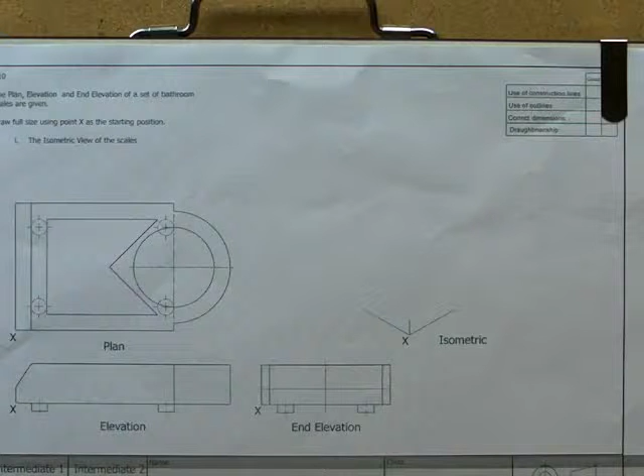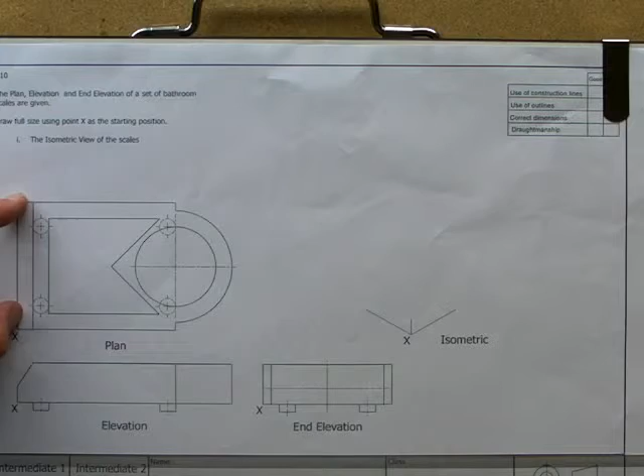Okay, so here we have A10, which is an isometric drawing. I'm going to get started just basically forming a cuboid, which is the length and the width of this shape here. This is maybe a set of bathroom scales, so you would put your feet there and the display here would show what weight you are.

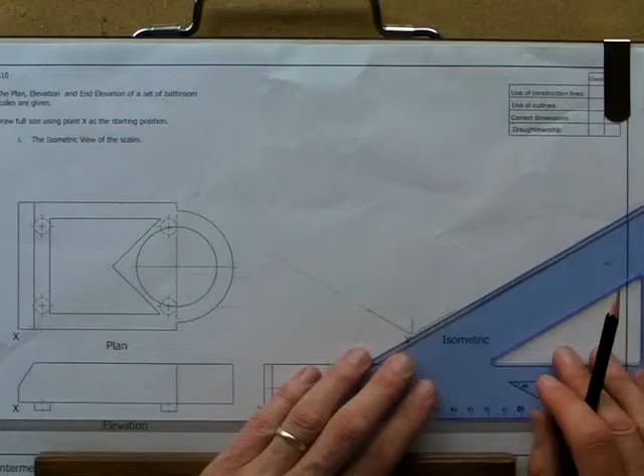Now, since it's an isometric, we're using a 30-60. So first things first, I'm just going to extend the 3 lines that are already there. And these are just extended, kind of rough sizes just now.

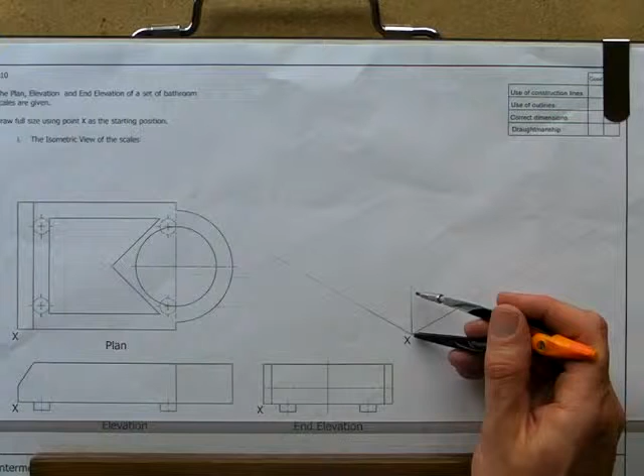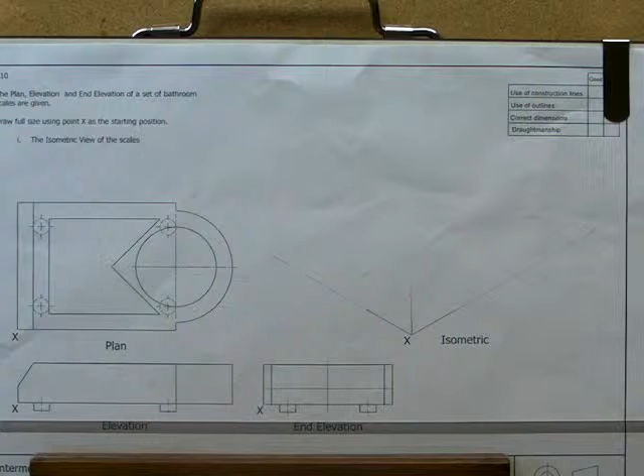Okay, now what I'm going to do is take some measurements using my compass. I'm going to measure the height, and then transfer it to here. I'm going to measure the length, and the full length is from there to there, and then I'm going to mark that one here. And then the width, which I'll measure across here, and transfer that onto here.

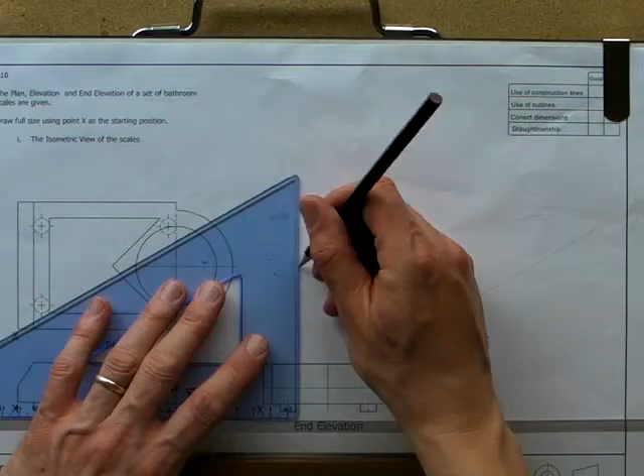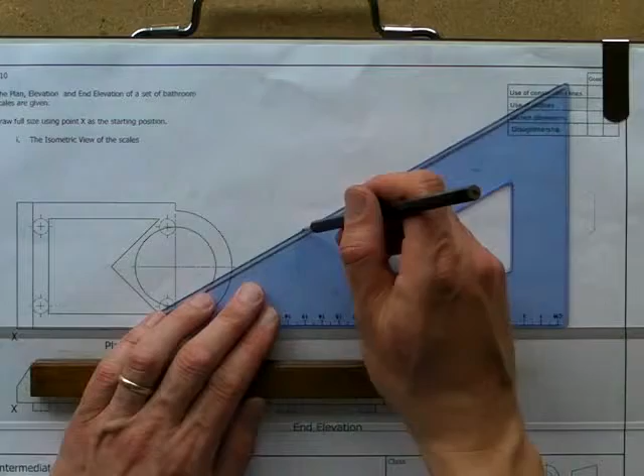Okay, so to these sizes I'm going to create a cuboid. So I'm going to go up from here, across from here, back from here, up from here, back from here, and then across from here. Okay, that's a basic cuboid.

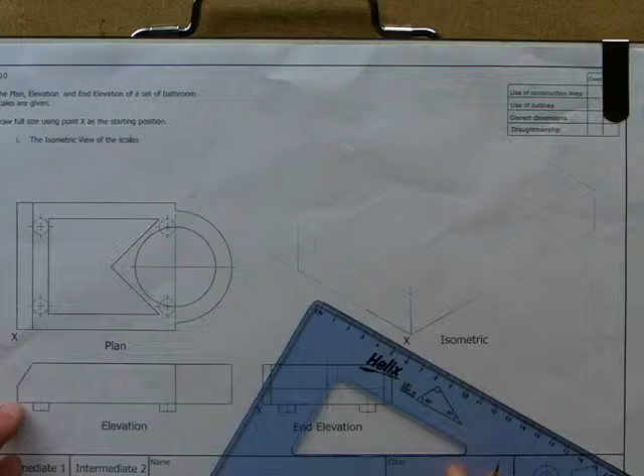Now obviously it isn't a cuboid because we've got this curved part here, we've also got this slanted part here. I'm going to deal with the slanted part first. The important thing about the slanted part is this side here is this side here. So if I can find where that point is and where that point is on the side, then I can just draw a line between them.

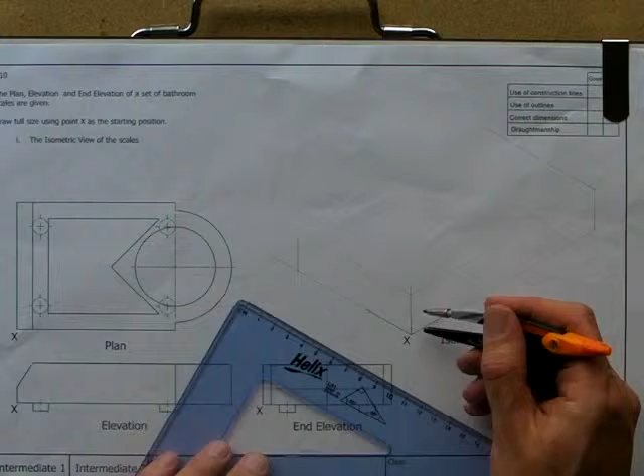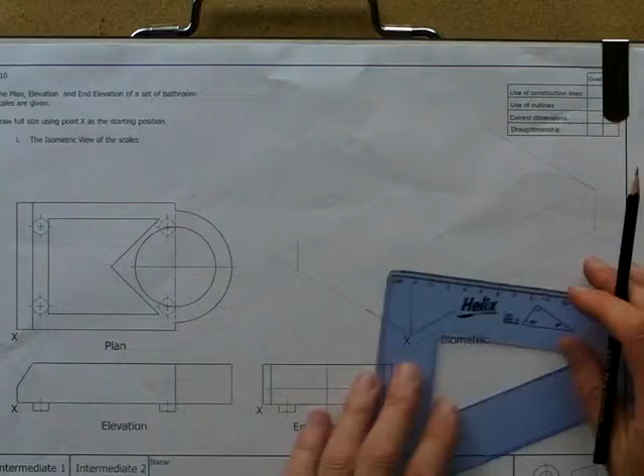So to do that, I'm going to measure the height from here to here, then transfer that onto here. Then I'm going to measure how far in it is. Now, how far in it is given by this distance here. As you can see, that's in line with that there. So I'll just measure that there, and then transfer that onto here. And where these two come together, I can just draw a line.

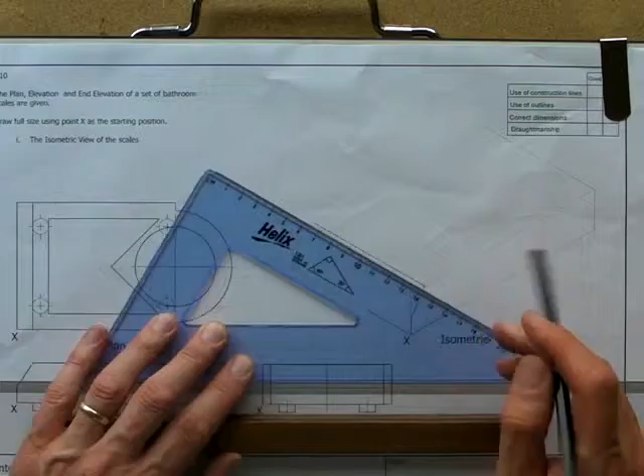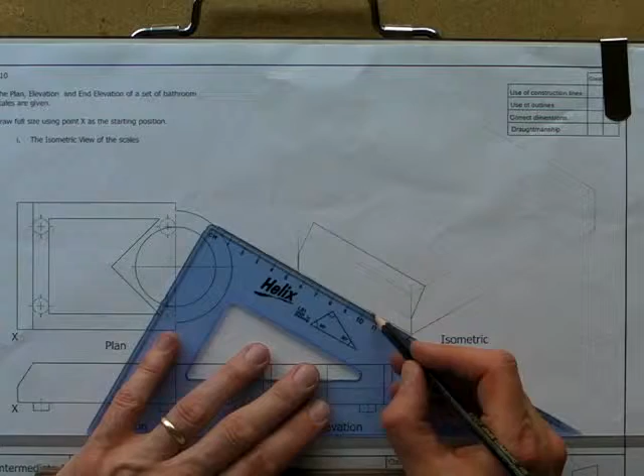So now I know that I have more or less the same on the other side, so if I just transfer this line across to here, and then this point across to here, and if I join these two up, then I have this part. Now I'm just going to finish off this end, just so that you can see what it looks like, just darkening that in.

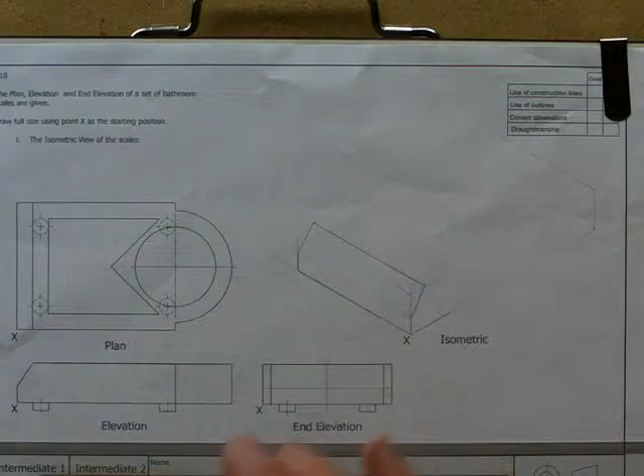Okay, right, at this end here we've obviously got the curve going on, and in order to do that we're going to have to put generators on this, because this is an isometric curve we're going to draw. So I'm going to deal with the outside curve first. I'm going to draw some generators using my 30-60.

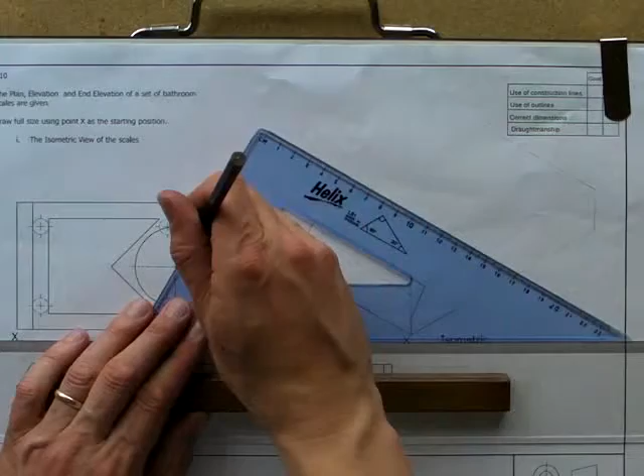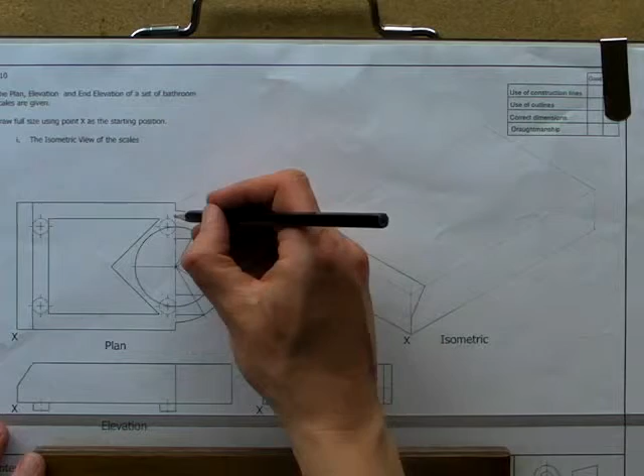Keep rotating this round, like so, keep rotating it through the centre to the outside edge, and then just draw lines from where it cuts the outside circle to the centre line, to the centre line, to the centre line, to the centre line, like so. Okay, 1, 2, 3, 4, 5, 6 and 7.

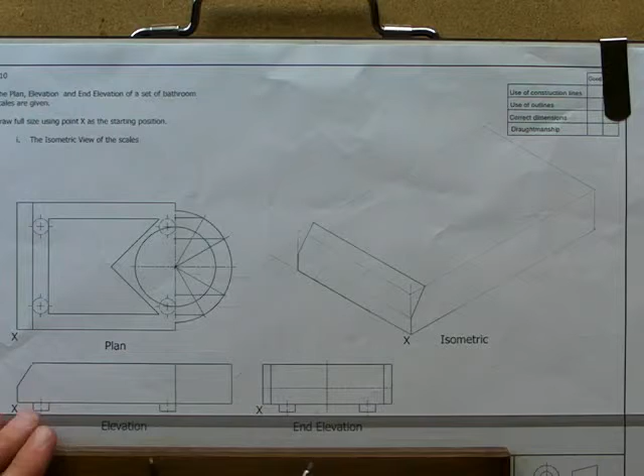All these points we have to plot along here, so obviously we need to work out where that centre line is on here. Again it's down to using your compass to work that out. If I follow the elevation, I can measure the distance between here and here, and that gives me the position along the side here. So I'll just show you that again.

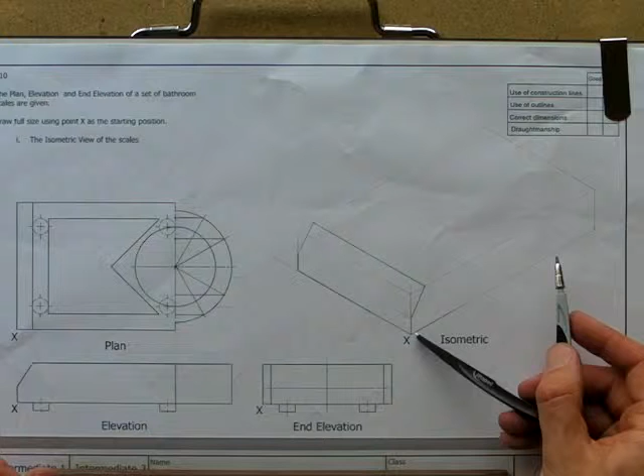Okay, now I could mark that on there, which would be fine, or I could measure it from there. I'm just going to mark it from here, which is fine. Mark that one there, and then I just have to project that line up, and then project a line across from that, like so.

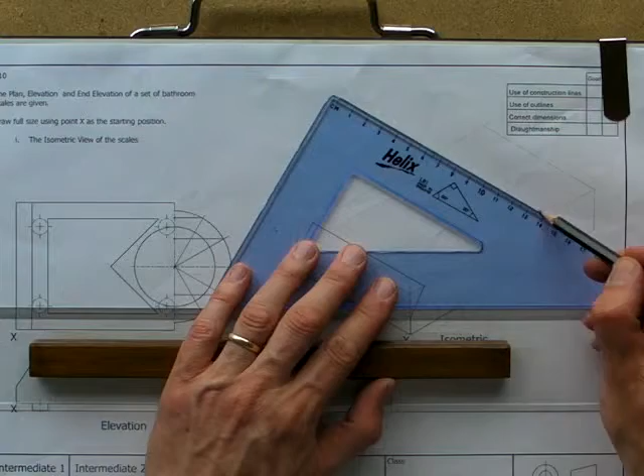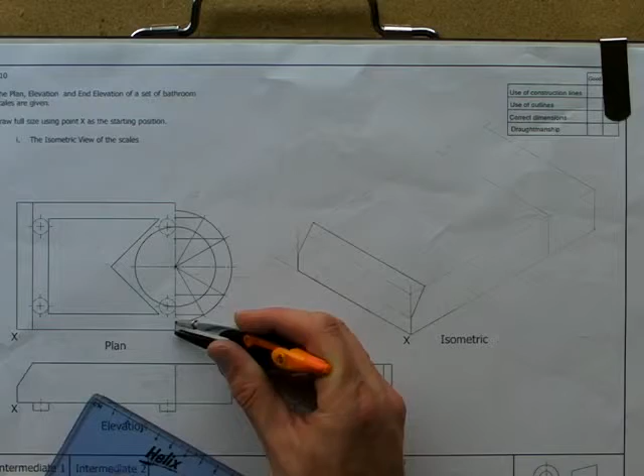Now, we also have these wee distances here where it comes in, here and here. So I'm going to measure that distance. It is symmetrical, so I'll need to measure it once. I'll measure that in to there. Mark it on here, and mark it on here.

So now I've got a centre line, which I'm going to mark in quite heavily so that you can see where it is. So that's just there. Long, short, long, short, long, short, long. Okay, so that's my centre line there.

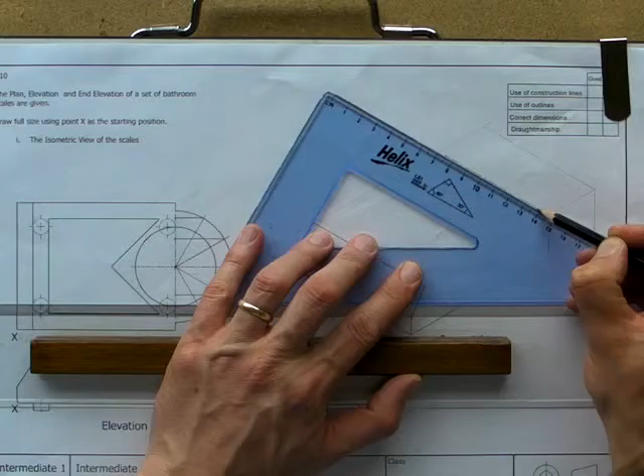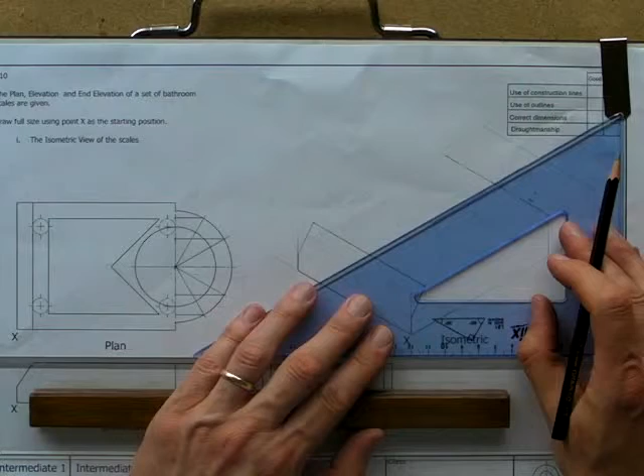Okay, I need to get the actual centre of it, so I'm going to measure from here to the centre, and then from here to the centre, and once again draw a centre line here. So it's long, short, long, short, long, short, long, short, long. Just extend that past the outside edge there.

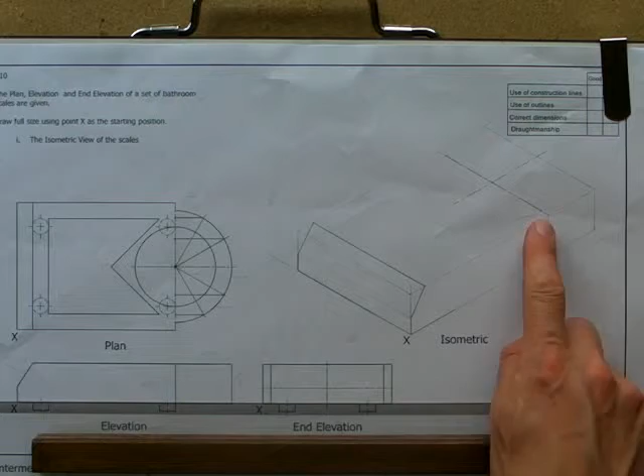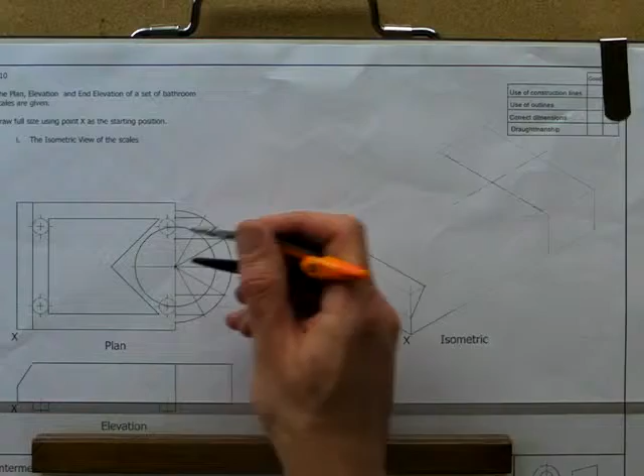Next job is essentially to transfer these 7 points onto this line here. Now the first point and the last point are already done, so I'm measuring everything from the centre. From there to the first point, then just transfer that onto here. Turn it round because it's symmetrical onto this side here. Next one, from the centre to there, from the centre to there, from the centre to there.

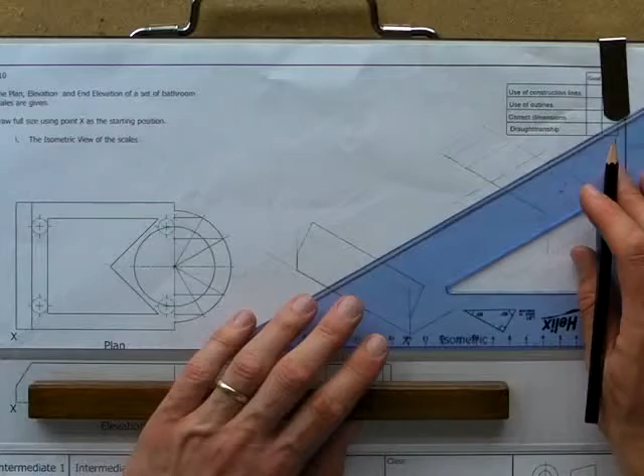We're going to build up a bit of a grid here, so I'm going to extend from this second point up, from this point up. That point's already been extended, up here and up here.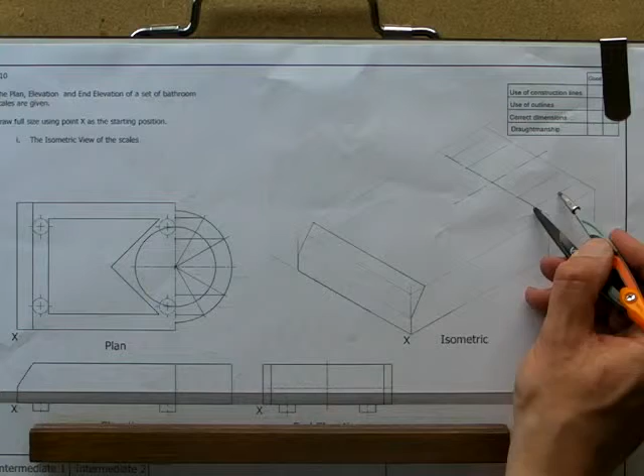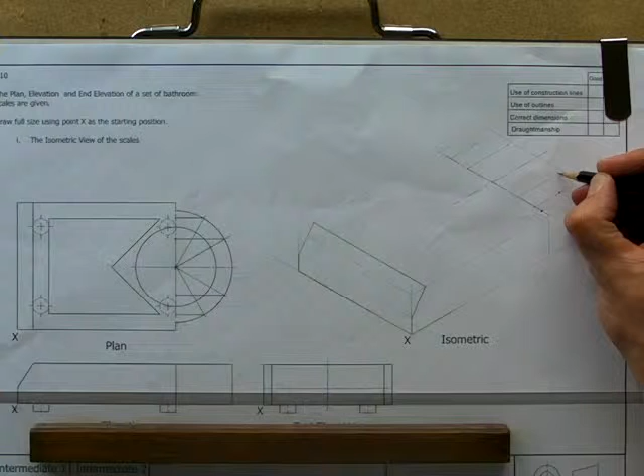Next job is to measure the heights of each of these. So we'll start with this one, measure that there, mark it on the corresponding point there and there. Move on to the next one, mark it on the corresponding point there and there. Okay, so now we have 1, 2, 3, 4, 5, 6 and 7 points, and that gives us where the curve is. So what we do next is just draw a smooth curve through these.

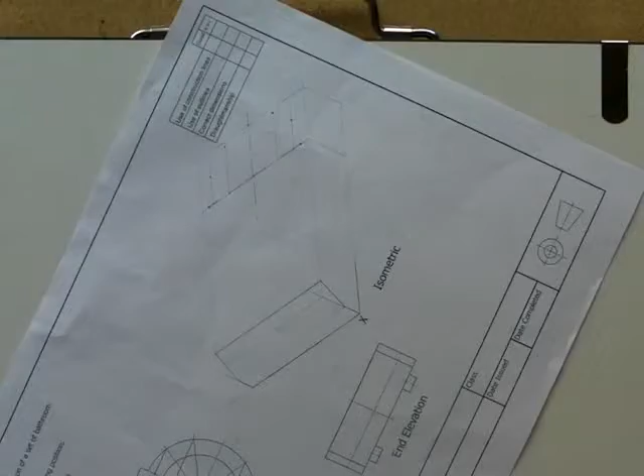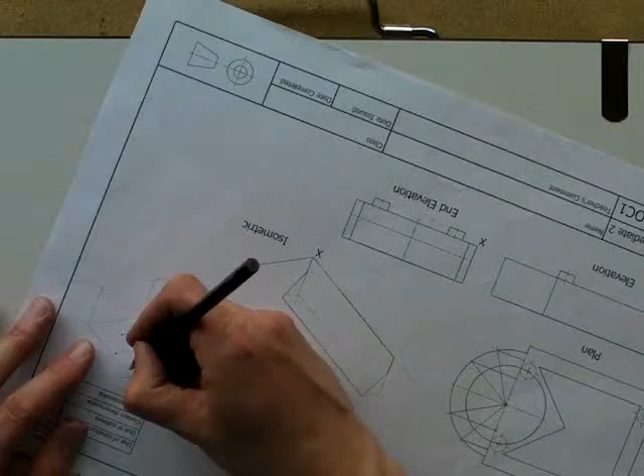Now it's always easier if you take this out of paper clips, and I prefer to do it like this. So just take it like this, and then I would prefer to go up and to the right. So up and to the right, turn it round. Now I really need to go up and to the left, unless I do this of course. Let's just turn it round to here, and I can go round, turn it round a bit, round, it's quite tight this one, round, and then down like that. And that's me got a fair curve through these points.

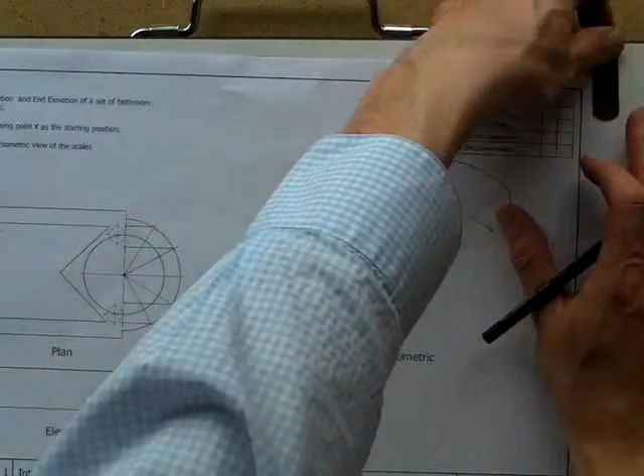Put it back in the clips, and we're ready to do the rest of the drawing. When you do that, just check it's square with the parallel slide, that it's parallel with the parallel slide.

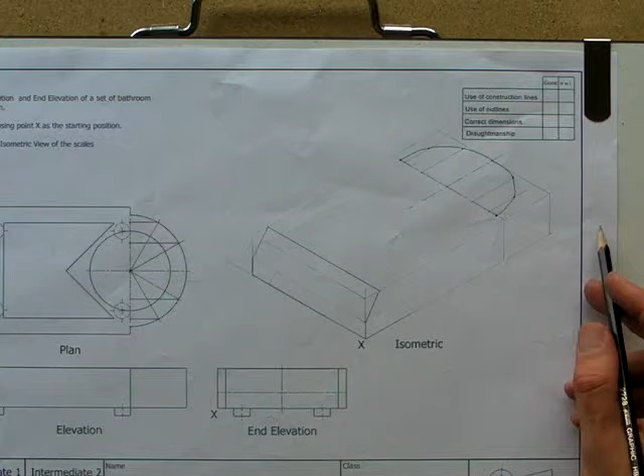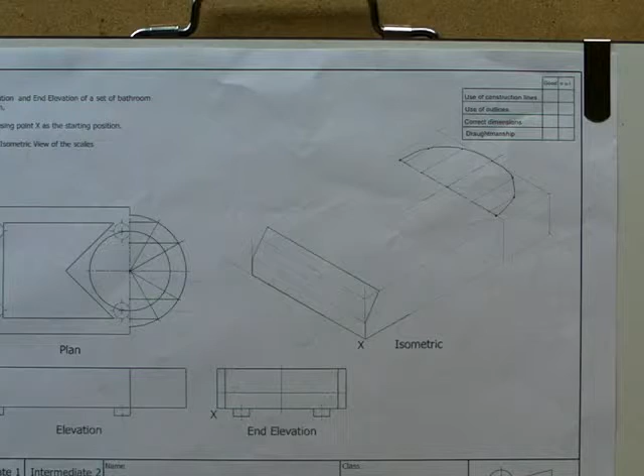Okay, there's obviously the bottom part of this curve. We're not going to see much of it. We're going to see some of it, but not all of it. Now, to work out where you're going to stop seeing it, what you do is, if you draw a diagonal between the centre and here, where that cuts the outside, which is there, that's the point that you stop seeing. That's called the tangent point. That's the point where you'll stop seeing any more of the curve.

So really we're only interested in this point and this point to get a feel for where the drawing is, and actually this point as well, which I'll put a wee dot on.

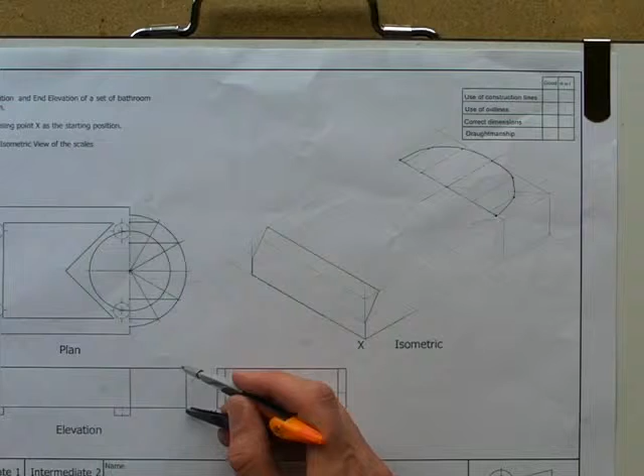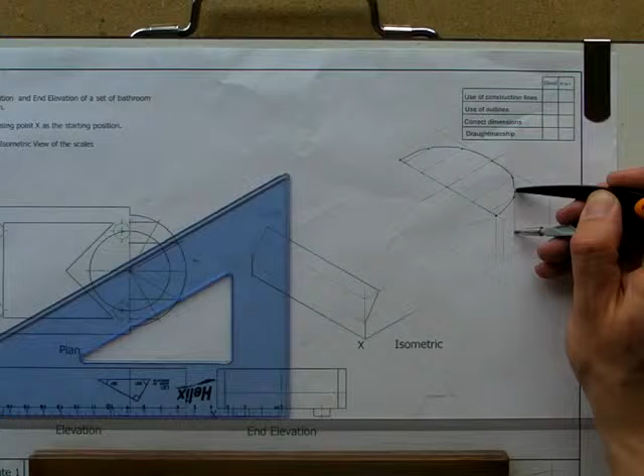So the way I like to do this is I'd measure how far down the curve goes here, and then I draw a line down from each of these points, and I just measure how far down it goes. So to there, to there, and to there. Now obviously this point here is hidden, but you can use it as a guide to where the line is going to come from. So the line is going to come from there and then go up to here and then go right up to there. So you can firm that in like so.

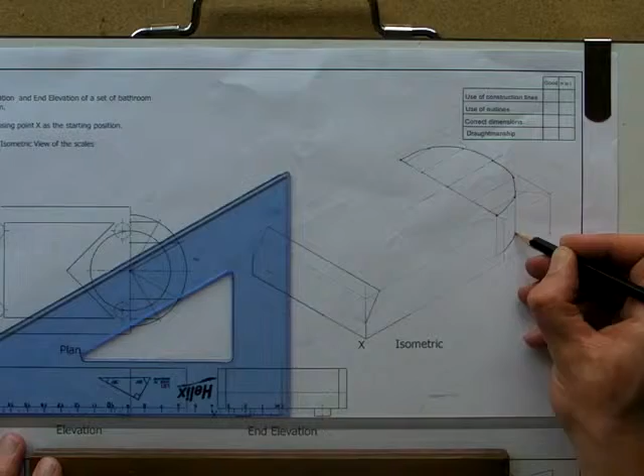And then that line that we drew down from the tangent point, we just firm that in like so. Okay, so we now have a nice neat curving point there.

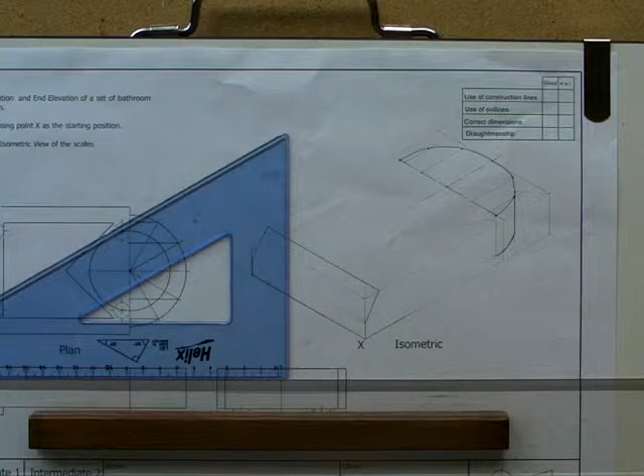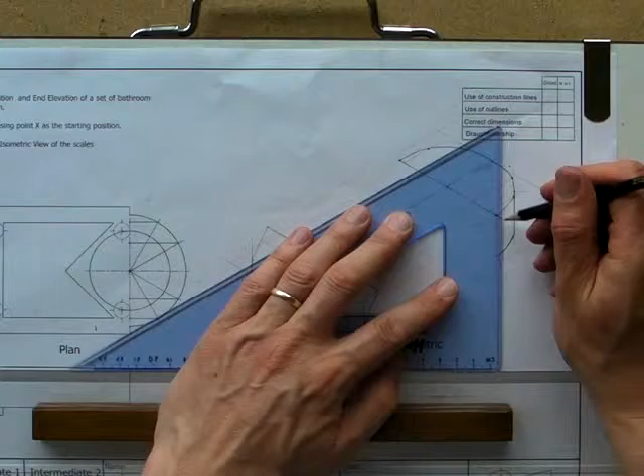Okay, now I have gone too far with this, so I'm going to have to get rid of that wee point there, which I'll do later on in the drawing. So I'm going to firm in this line here, which goes down, right down to the bottom, and that part there, that wee tail that I've drawn extra, I will get rid of shortly.

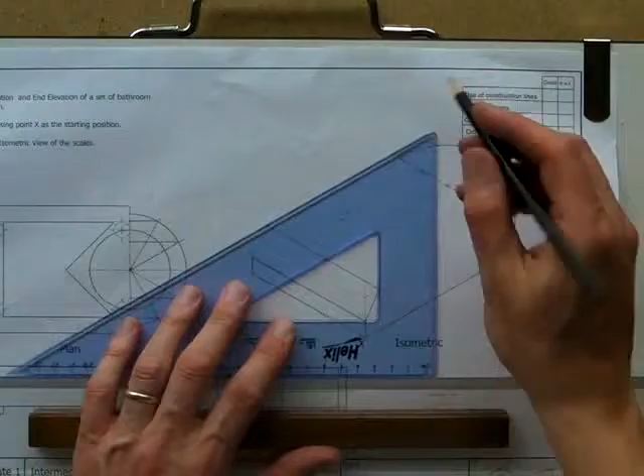And I'm going to firm this line in here. This is an edge. Okay, and I can firm in this line here, and I can firm in this line here. That's most of the kind of hard part of the drawing done.

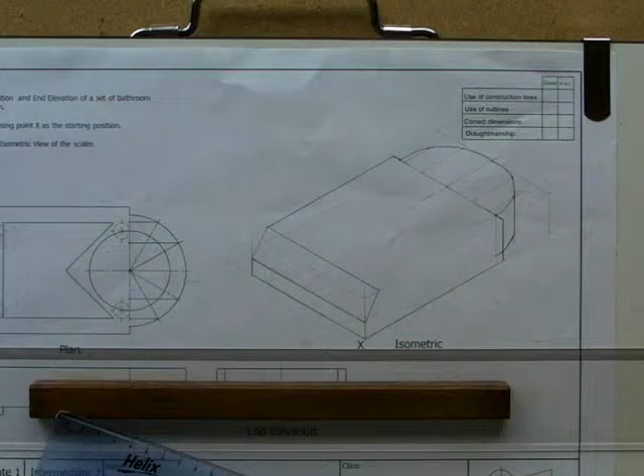What's left now is to do this inside out isometric circle and then this shape here. So we'll do this now. So what we have to do is split this up into a clock face and then project the points onto the drawing.